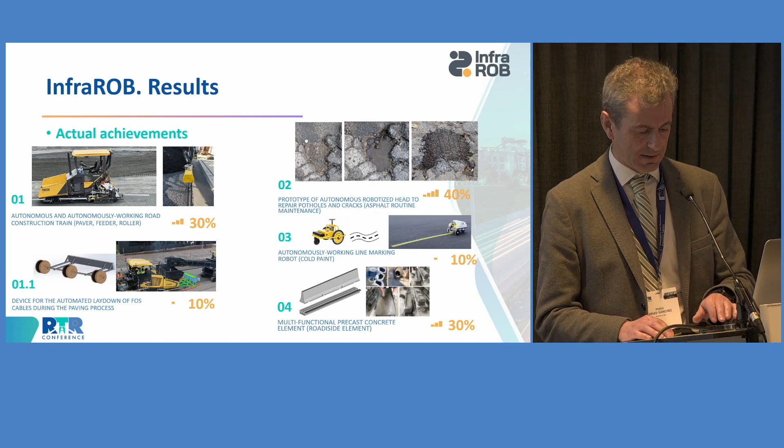Another prototype is an autonomous robotized head to repair potholes and cracks, currently at about 40%. Another is the autonomous robotized line marking robot, at 10%. And another is precast concrete elements and safety barrier elements, as you can see in the slides, at 30%.

All the achievements are gathered in this slide. Another one is about the collaborative operation between safety cone robots and drones for work zone segmentation and signaling in areas where the other machines will be working.

Another task is about the pavement management system upgrade, taking into account the robotics and the information that the robotics supply to the system.

We are working as well in a digital twin solution for a pavement management system. And last but not least, we are working in a traffic management system upgrade, considering these robotic solutions and this pavement management system.

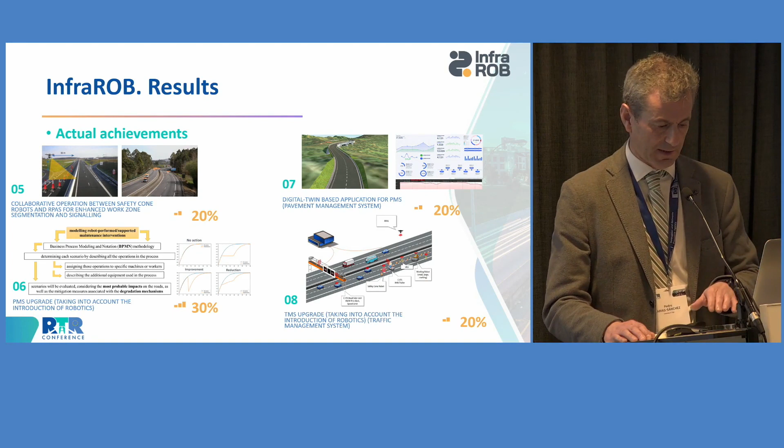The results we have gathered, we are working on ways to protect the results or put them in the market. Our first intention is to make a patent of the autonomous paver sensor control system, for intellectual property rights protection, and the asphalt mixture candidate to repair small potholes and cracks.

On the other side, we are developing some products and services to bring to the market. We have identified 4 different products or solutions: the autonomous line marking robot and support, the drone system for monitoring work zones, the upgraded pavement management system,

and the fiber optic solutions for pavement damage detection. The product to the market is a multifunctional precast concrete element, and finally the service to the market is the digital twin based on an add-on application. These proposals are based not just on the characteristics of the product, but also considering the interest of the partners working in this field.

The expected impact of the project - I have summarized this expected impact in 3 main components. Upgrade of management systems for decision making, taking into account the introduction of robots or robotics in this field of work. The autonomous robotized solution for work zone segmentation and signaling based on drones. The autonomous robotized interventions and modular solutions. The impact can be summarized in these 3 components.

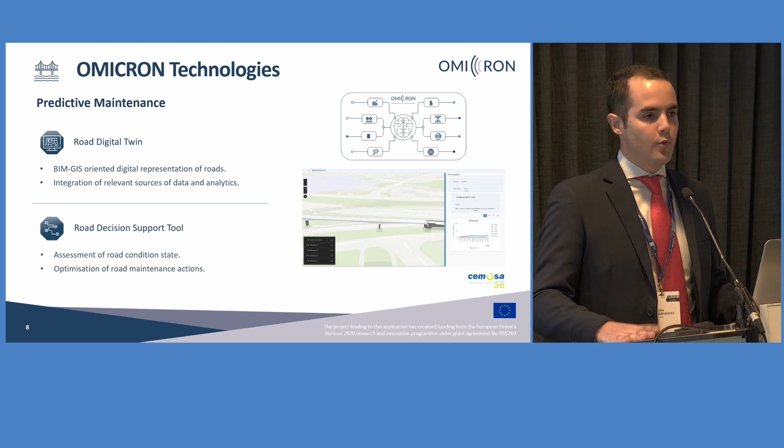On the second area, with respect to predictive maintenance, we are working on the development of a road digital twin, which is a BIM GIS-oriented digital representation of roads, integrating all the relevant sources of data from the infrastructure, as well as the analytics and predictions that we're working on in the project. This is closely related to our road decision support tool, where we aim to assess road condition state of different assets and then optimize the way in which we perform maintenance actions.

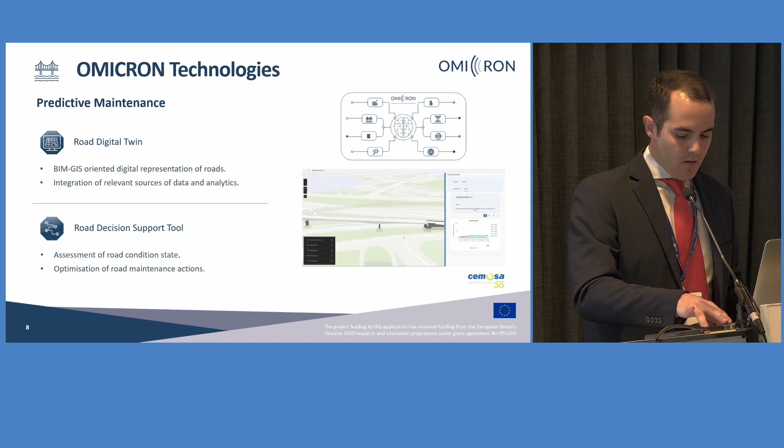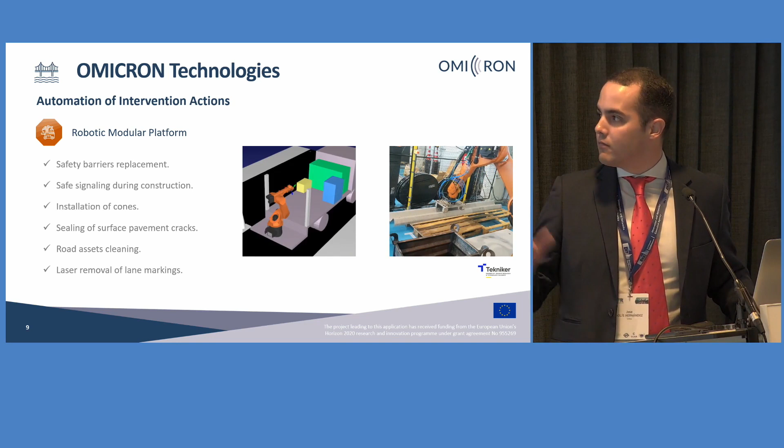The next area is related to the automation of intervention actions, and in this respect, the first development is the robotic modular platform. We are developing such a platform in order to perform various ordinary, extraordinary, and emergency intervention actions on roads. We have some use cases as examples in the project, including safety barrier replacement, safe signaling during construction, installation of cones, sealing of surface pavement cracks, road asset cleaning, or the removal of line markings with laser. In these two videos, you may see the concept and some preliminary tests that we have performed.

The second point is related to the rehabilitation of surface pavement layers, where we have integrated a set of sensors, including paver and roller location, thermal control and weather conditions, or pavement surface textures, among others. The objective is to analyze every step along the paving process in order to provide decision support information to the operators. In this way, we are also promoting the use of greener pavements by using AUTLs and recycled asphalt pavements.

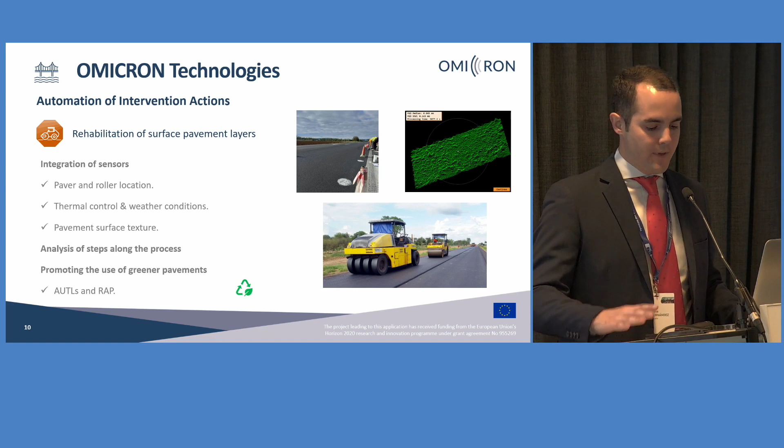The last area related to this robotic modular platform is related to AR and VR. We work on AR tools for worker support, using various devices such as tablets and glasses, to support the robotic modular platform processes. We also develop a VR platform, in this case for robot teleoperation of the robotic modular platform, and also for training workers on specific maintenance tasks.

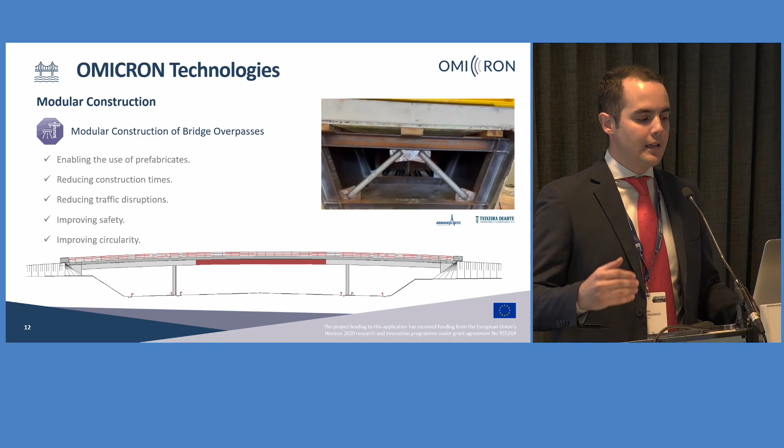The last area I would like to highlight is related to modular construction, in this case of bridge overpasses of a particular type with reinforced concrete elements on the sides and steel elements at midspan. The objective is to enable the use of prefabricates while reducing construction times and traffic disruptions, thereby improving safety and improving the circularity of the solutions currently used in this particular type of bridges. This video is about one of the tests we have carried out in the project on this solution.

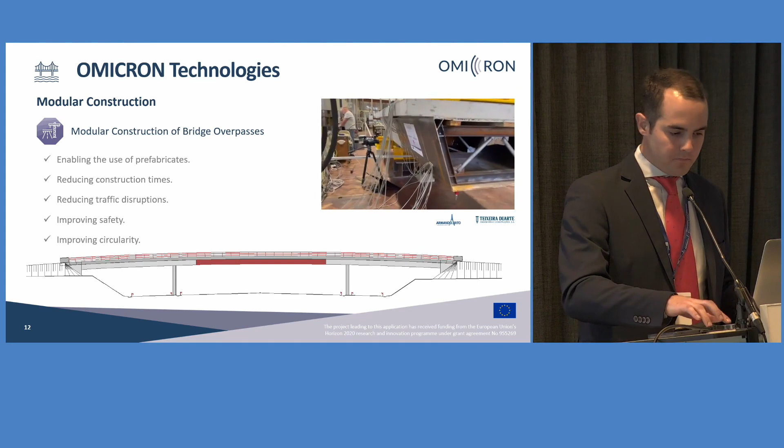Last but not least, we have extensive cooperation with other projects. After the presentation of Pedro, you may see that we have shared objectives with InfraROB and with HERON, in terms of safety, better road services, and cost reduction. We also have, as Pedro says, periodic interaction in terms of inspection, robotics, and asset management, mainly.

We also interact with other projects such as ISRIUM with respect to the use of satellite information, which we believe would be a very good addition to the platform we are trying to develop in Omicron. Finally, we also have close contact with piloting, coordinated by CATEC, one of our partners, on advanced inspection systems with drones mainly.

In terms of project impact, this is very much related to our demonstration methodology, which is divided into 3 stages. The first is related to preliminary TRL 4 to 5 testing. This leads to the second stage for technical demonstration of specific technologies from TRLs ranging 5 to 7 in specific locations in Porto, Seville, Guadalajara, and Valencia. This leads to the final stage, the final demonstration of the whole Omicron platform at TRL 7.

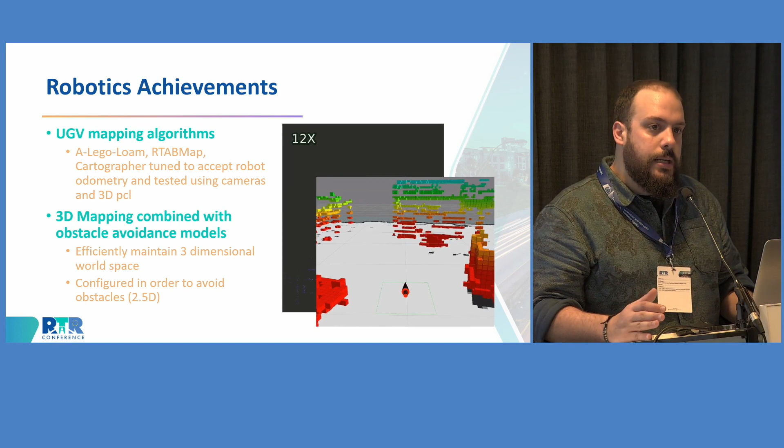We are also developing a 3D mapping structure combined with obstacle avoidance models. So we are developing technologies where we can efficiently maintain a 3D world space and move around it, and also configure a robot to avoid obstacles in 2.5D, not a full 3D aspect.

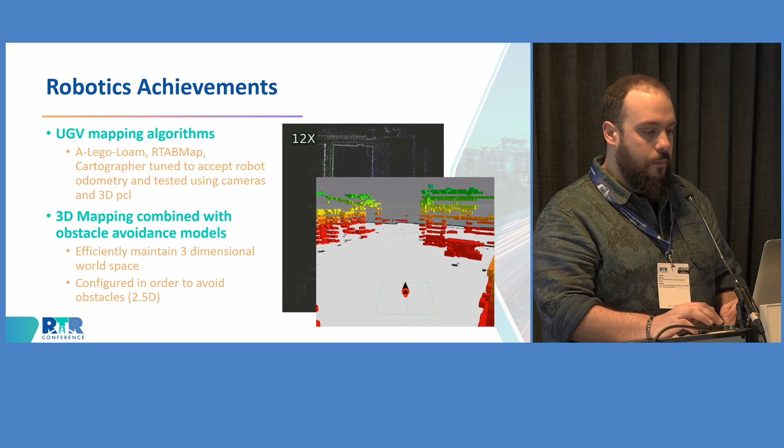Currently, we are adapting the UGV to support our use cases. Because we have additional tools on the robot, we need additional electrical support to power the tools. Because we need to manipulate the robot beforehand, we are developing exchangeable modules to support all the planned interventions. We are also mounting the robot with multiple camera sensors and other types of sensors, such as depth sensors and LiDAR, to make sure we can use the robot and move in the maintenance area.

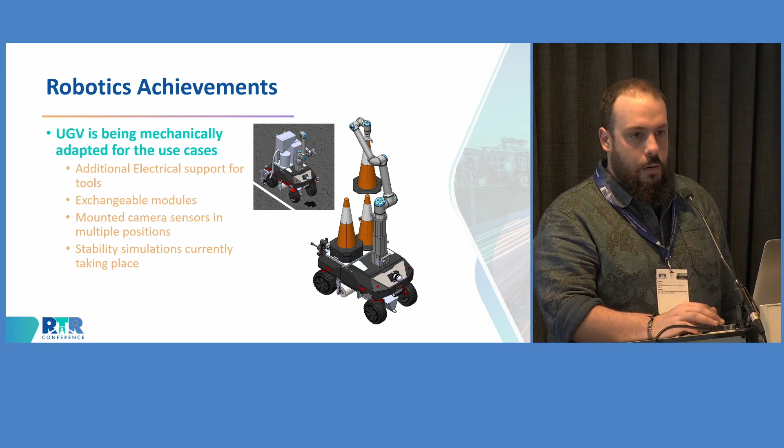We are on the simulation stage right now, performing stability simulations for the robot.

Moving on to the robotic arm and controlling the robotic arm: right now we're providing a low-level control platform for the robotic arm. We have a pipeline which focuses on tracking performance and stability with variable loads, and we are adapting different sensing devices and strategies to increase performance.

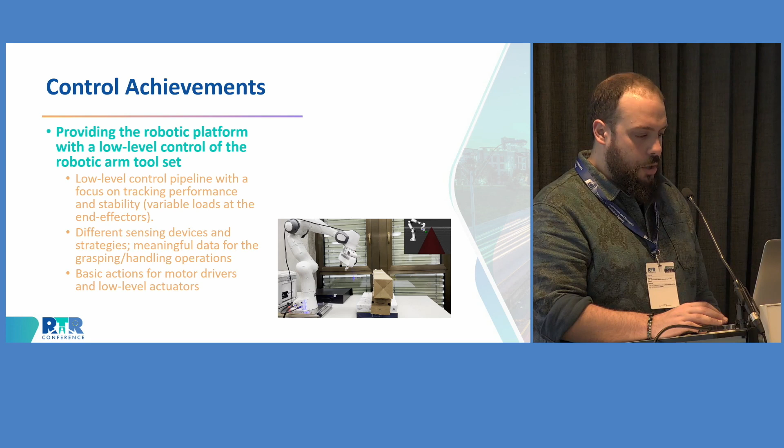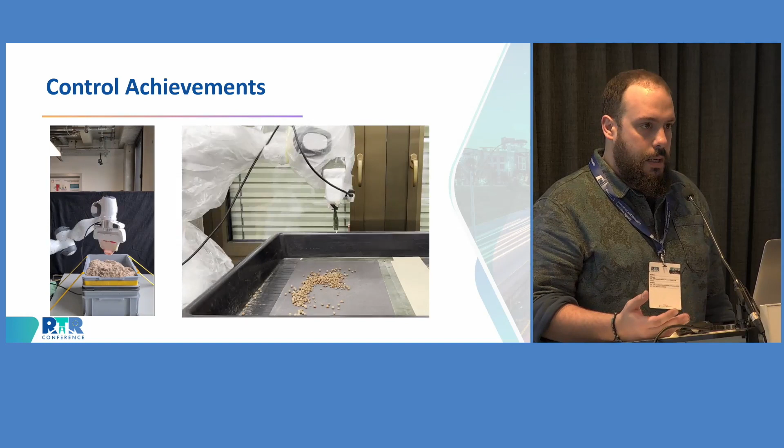We are assigning basic actions for motor drivers on the robot arm and the low-level actuators. We are doing this so the robot arm can essentially perform a lot of the interventions and the work needed for them.

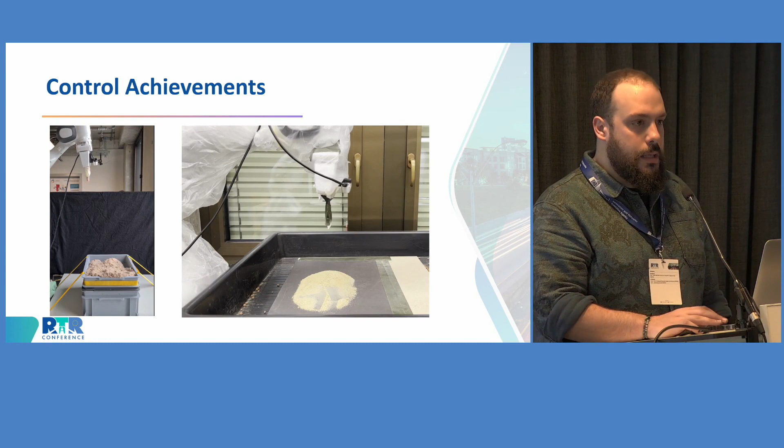We are seeing here the robotic arm actually trying to patch a pothole. On the left-hand side, we see how we can spread material using the robotic arm to actually patch the pothole.

The final technological pillar of our achievements has to do with both the sensing and the relevant AI and deep learning modules, to understand what the sensing data show us and to increase situational awareness.